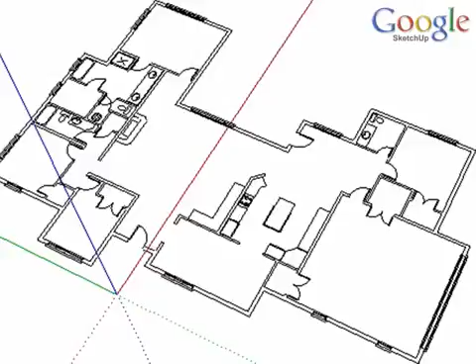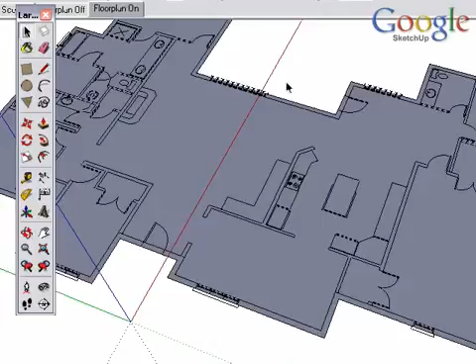There are many strategies to working with CAD files in SketchUp. This video introduces our recommended method, though we encourage you to tailor these techniques to best fit your workflow. Also keep in mind that although this information should be useful to any SketchUp user, we will progress through the steps assuming you have a basic knowledge of SketchUp tools.

Start by going to the File menu and choose Import. Find the CAD file on your computer and open up the options. Check both of these boxes and leave those on by default. Set your units to match the units you had in your CAD software. Preserve drawing origin is important if you're going to bring in multiple CAD files.

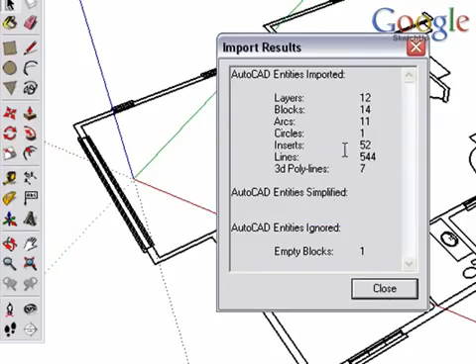Make sure under Files of Type that you've chosen AutoCAD Files so that you can see the CAD file to bring in. SketchUp will share some import information with you. Close that dialog box. Now let's examine the model. The first thing that you should consider and get in the habit of doing each time you import a CAD file is to check the physical size of the imported CAD file.

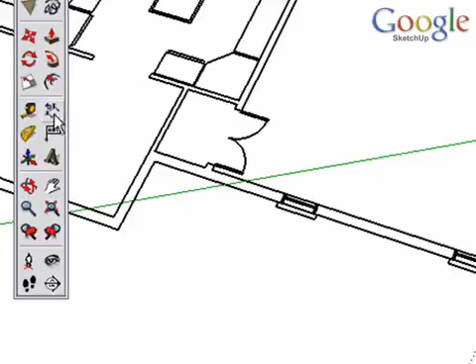Use the tape measure tool and measure something you know. I know this wall would measure at 5 feet, and so it's at the correct size. However, often your CAD file will come in and it will not be at the correct size. If I measure this wall, it measures at 27 feet 6 inches.

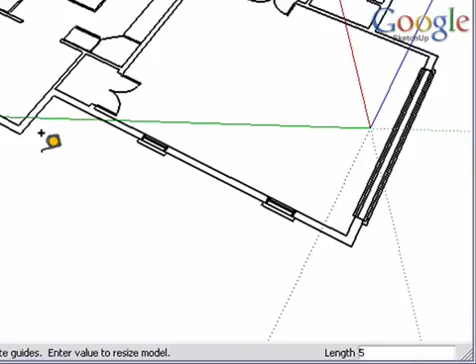You can actually resize models in SketchUp by typing in a new dimension and pressing the Enter key. I made that wall 5 feet. I'm going to measure this wall again, type 5 feet, and now I know that it's at the correct size. So you can use the tape measure tool to resize the model if it's incorrect.

Now this is a previous method for using CAD files. You trace over an edge, creating a surface, and then be able to pull that up. Now this creates some unnecessary lines that you need to clean up. Usually that's not too big a problem.

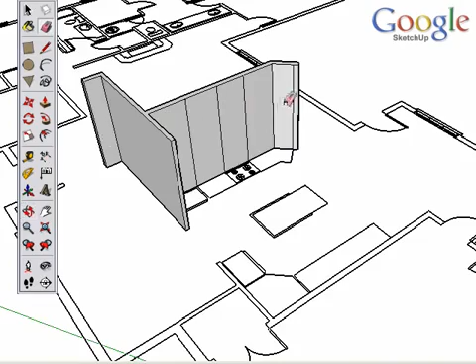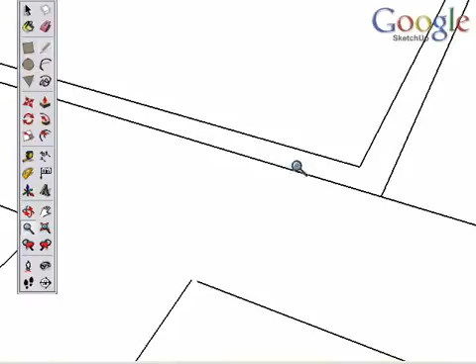The problem comes here. As you're working around your model and trying to create surfaces to pull up, sometimes it doesn't work. As we trace over these edges, nothing happens. And here's why. Zooming in reveals that in fact these two edges don't meet. There's a little gap there, and SketchUp requires that we have a full closed loop of edges to form a surface, and that's why a surface couldn't be created.

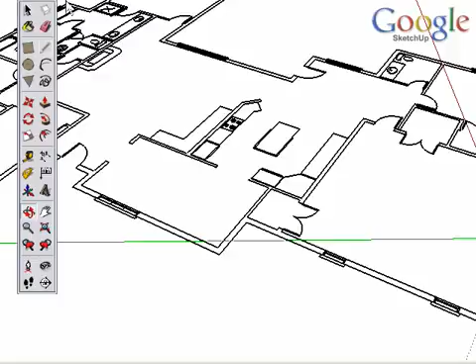Those little gaps tend to pop up all over in CAD files, and they're very difficult to find and just cause general problems. For that reason, we recommend the method that we create this CAD file as a group and use it as a reference only. We're not going to use it to create the geometry, we're only going to reference it and create a model on top of it. I'm going to import this CAD file again.

You'll notice that there was nothing existing in the space before, and as you see, it brings it in as lines and edges, groups out of things that were blocks in CAD. So I'm going to select it all and create a group.

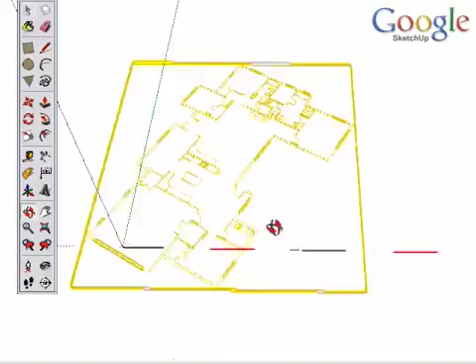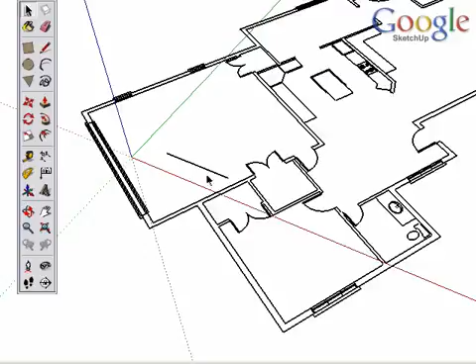We'll start a new file and show you what happens if you import a file and you have existing geometry. Let me draw a line. So now we have something existing in the model, and we import the CAD file. And what you'll see is it's grouped automatically, the CAD file. Before it was not grouped, and we had to make it a group, and in this case it is grouped.

That's just so that you understand when things are grouped or not when you bring a CAD file in. That's what's happening. If you have anything existing, your CAD file will be grouped automatically. Otherwise it won't, and you'll need to group it yourself.

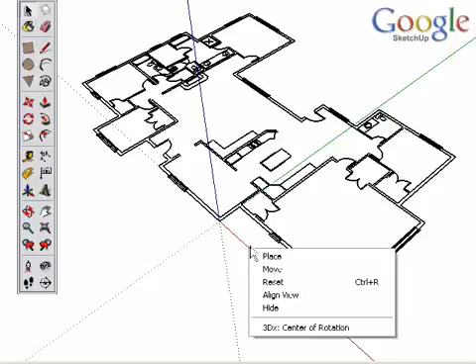The next thing we should do is line the axis up with the CAD file. We can do this with the Axes tool very quickly and easily. Or as an alternative, if we left the axis in its default position, we could rotate the model and line it up with the axis.

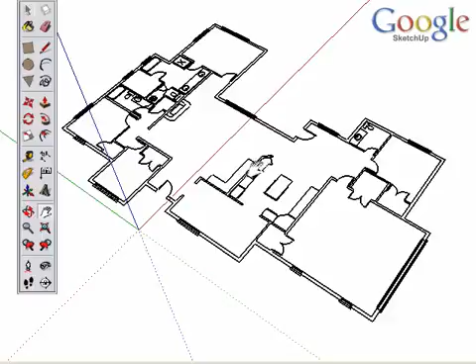Now let's look at the layers. When you bring in a CAD file, it brings in the many layers that you've created in your CAD program. These layers can cause a problem if we leave the geometry on all these different layers. So what we recommend is that you select all the layers that came in. You can see layer 0 at the top.

Select all the layers that were brought in with the CAD file, everything except layer 0, and delete them. And choose Move Contents to Default Layer. In this way, we won't delete anything that we've imported, but we move all the geometry to one layer, the default layer 0.

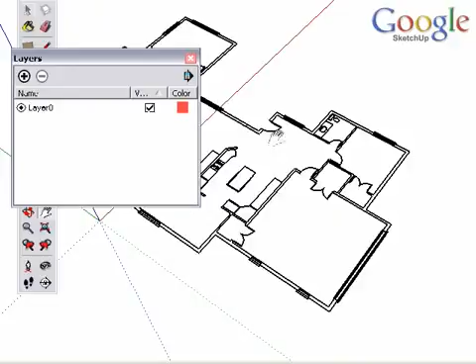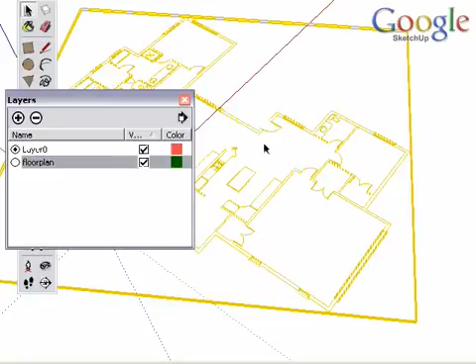Now let's create a new layer. We can name it floorplan, and we'll move this group to that layer. Bring up the entity info for the group, which you can do through a right or context click menu, and under Layer, choose floorplan to move it to that layer.

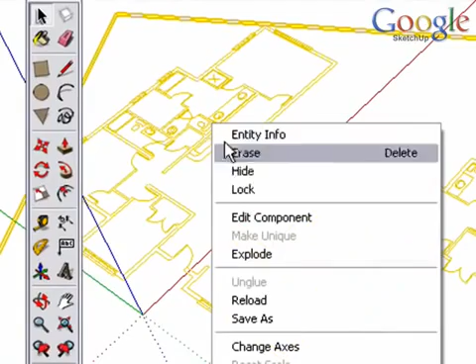Now in the Layer dialog box, we can turn the visibility of the layer on and off. This will become very useful, especially as it's a reference only, and we can turn that reference on and off. Right or context click on your group and choose Lock. Now we can't erase or otherwise manipulate our reference layer.

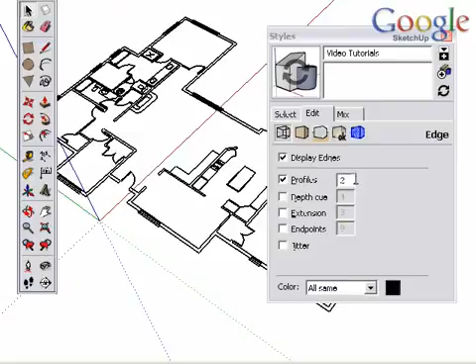Another setting that you might want to change is the style. Open the Styles dialog box and choose the Edit tab. And under the lines, you can see we can turn the profiles on or off. Depending on your personal preferences, you may want to turn the profiles off, or you can thicken them up if you like. For our purposes, we're going to turn them off.

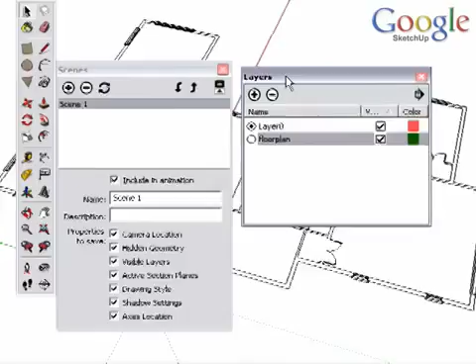The final step we'll take in preparing this model is to bring up scenes and associate these scenes with the layer visibility. Again, you can find under the Window menu, Layers, Scenes, and other dialog boxes. In the Layers dialog box, I turn the visibility of the floor plan off. And in Scenes, I'm going to turn off all of the properties to save except Visible Layers. I only want to affect layer visibility, and add a scene.

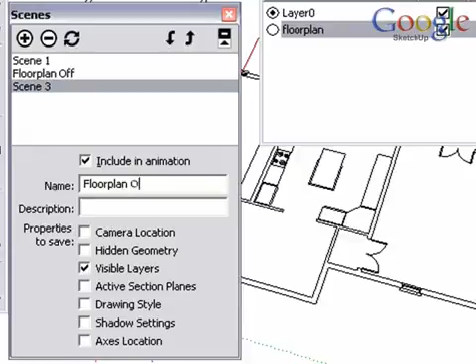Rename it, and press Enter. And now I have a scene with the floor plan off. In the Layers dialog box, turn the visibility back on and add another scene. Rename it. And now we have two scenes so that we can easily toggle the visibility of the floor plan on and off.

We've taken a few minutes to set this floor plan up correctly. After you've done this a few times, it becomes a very quick process to set up your CAD plans. Let's review the steps and then watch our next video to continue.